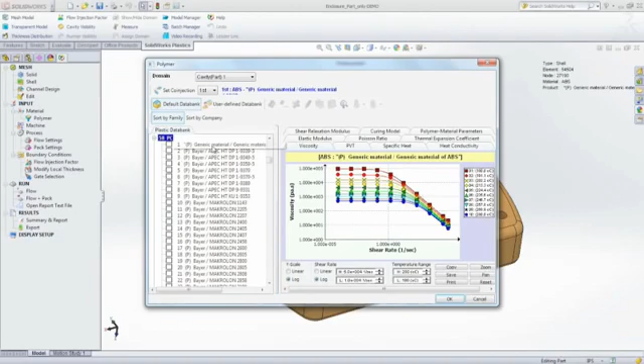Fully embedded inside of SolidWorks with intuitive workflows, SolidWorks Plastics allows you to choose a material from a database containing thousands of the most commonly used plastics. Once you've selected the material, you can then specify various processing parameters, such as injection molding machine size, melt temperature, mold temperature, and injection time. Of course, you can also accept intelligent default values for any of these.

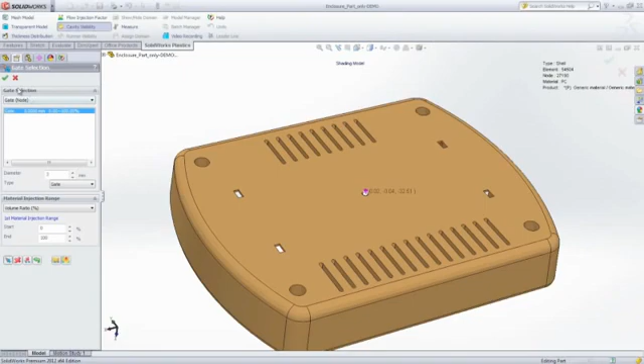The next step is to choose an injection location and run an analysis to determine whether or not your part will fill with melted plastic, and if there are going to be any manufacturing defects. Being able to predict and eliminate those defects and avoid costly mold rework is what makes SolidWorks Plastics so valuable. In this particular case, the part does not completely fill. It's what we call a short shot.

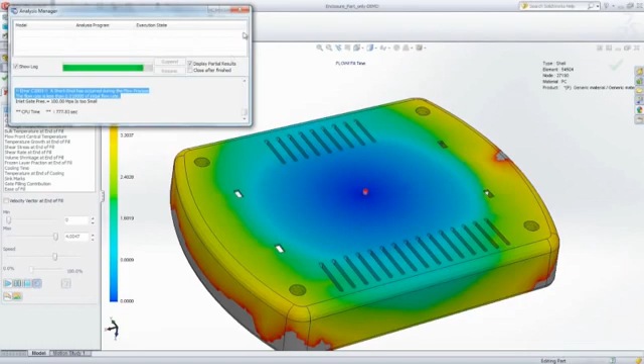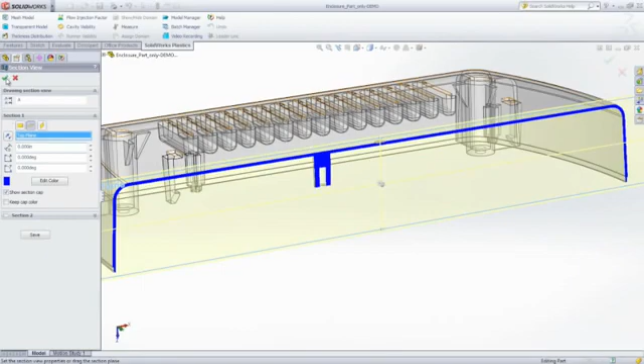SolidWorks Plastics generates a number of result plots, including fill time, pressure distributions, and temperature distributions that we can look at to determine the cause of the problem and identify potential solutions. And by animating the fill time plot, it's easy to see that the melted plastic does not reach the edges of the part cavity. Here, we've determined that the part wall thickness might be too thin, so we're going to increase the wall thickness, run another simulation, and see what happens.

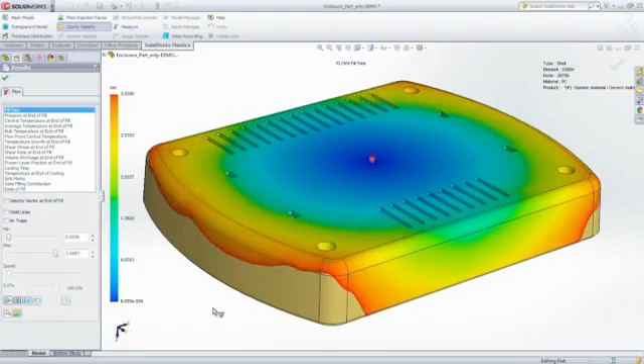Of course, changing the part wall thickness is quick and easy because you can use the same SolidWorks features and functionality that are part of your day-to-day workflows. You can now see that the part fills completely, and the fill time animation shows you exactly how this part will fill. This animation also provides insight as to where weld lines and air traps will form, and if there will be potential cosmetic or structural problems.

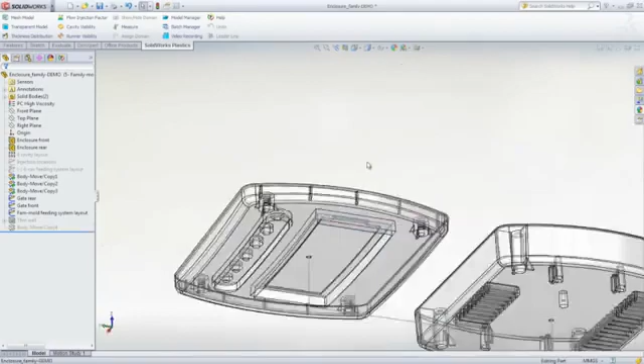We can now move on to designing and analyzing the family mold layout that will be used to produce this part along with its mating component. When manufacturing mating plastic parts, as seen here, it's common practice to mold both parts in the same mold so that they have the same molded part properties, such as mechanical strength, surface appearance, optical properties, and chemical resistance.

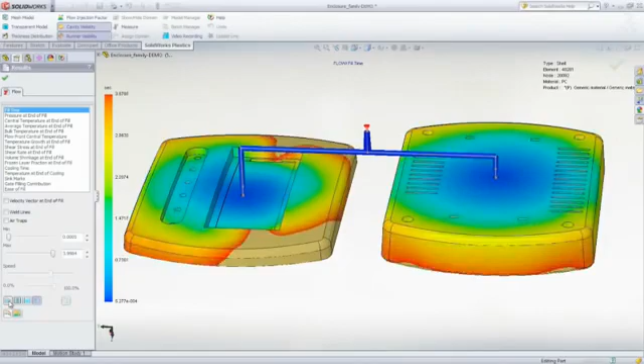However, an additional challenge is introduced because when you mold two or more parts of differing geometry in the same mold, your goal is to get all the mold cavities to fill at the same time. And this can be virtually impossible to achieve without the use of SolidWorks Plastics simulation. The good news is that you can perform a runner balancing analysis in SolidWorks Plastics. This is a multi-iterative analysis with the objective of filling multiple cavities of differing geometry at the same time.

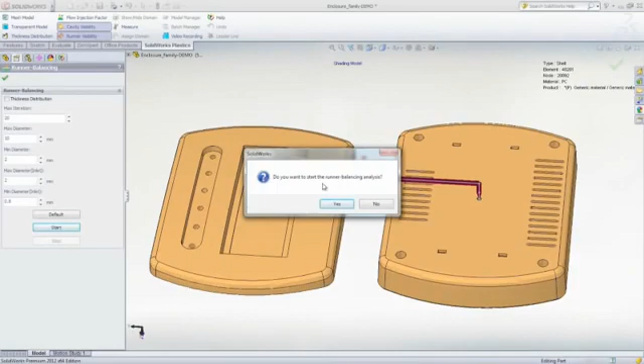As the iterations progress, the runner dimensions are changed to achieve balanced filling. And once SolidWorks Plastics converges on a solution, it will indicate the final runner dimensions required to achieve balanced filling, resulting in mold cavities that fill at the same time and with uniform pressure distributions, minimizing the risk of post-molding defects such as part warpage.

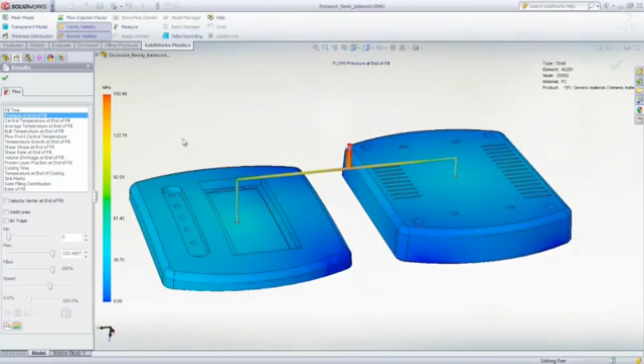With SolidWorks Plastics, you can predict and avoid manufacturing defects during the earliest stages of part and mold design, eliminating costly mold rework, improving part quality, and decreasing time to market. This has been your first look at SolidWorks Plastics.